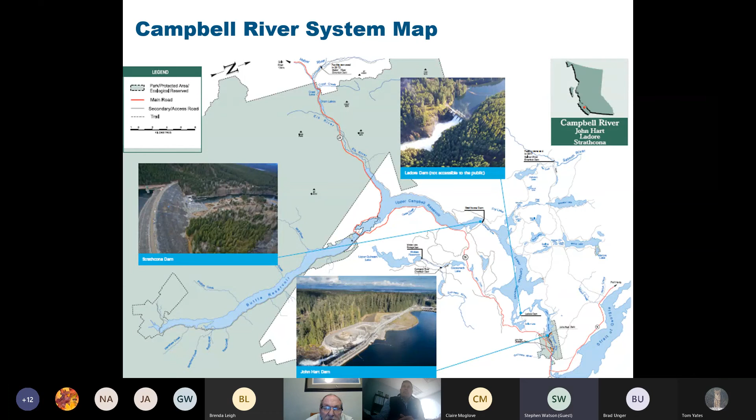Okay, the next slide please. So this is about the capital projects we have planned related to seismic risk. BC Hydro spent about 6 years and $10 million to better understand the potential seismic risk. There are 3 types of earthquakes: a surface earthquake, a deep crustal earthquake, and the big one, a Cascadia subduction zone magnitude 9 earthquake that hits about every 500 years. We want these 3 dam facilities to be able to withstand that type of earthquake and hold the water back. This gave us a better understanding of the ground motions needed for our dams to withstand that. So that's the goal of all 3 projects.

The Strathcona Dam and the John Hart Dam are a potential concern in terms of failure in the event of a major earthquake. The Ladore Dam is a concrete dam found on bedrock, but we need to upgrade the spillway gates. Next slide.

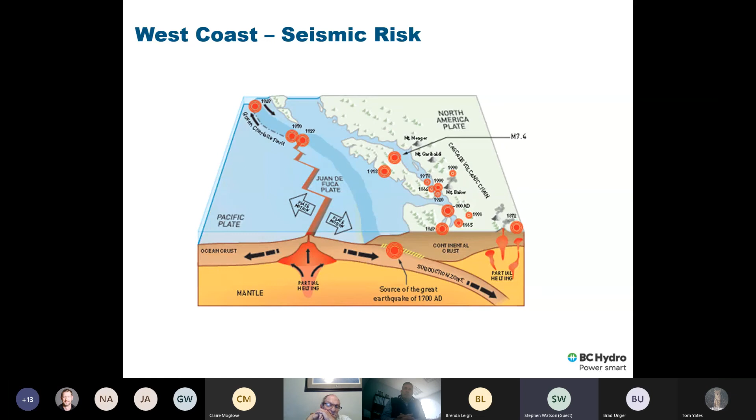This is the John Hart Dam, just over 800 meters long. We have the spillway gates releasing water for flood risk management, the low level water release valve for fish habitat flows, and the intake below ground into the underground powerhouse downstream. Next slide.

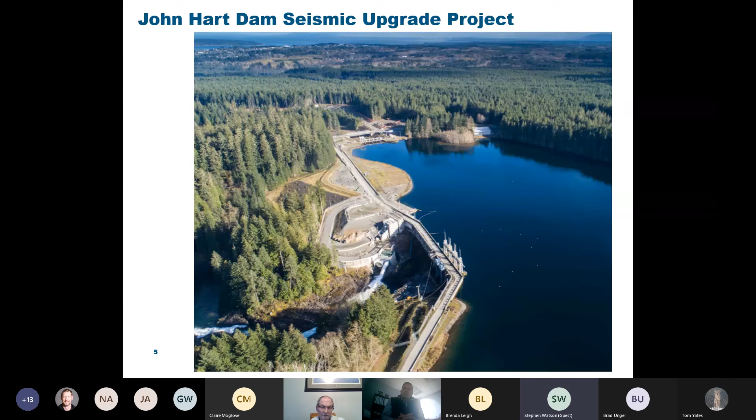This is another view, the downstream view of the spillway gates and the low level outlet. On the top left you can see the City of Campbell River Water Treatment Building, which intakes directly into the John Hart Reservoir. Next slide.

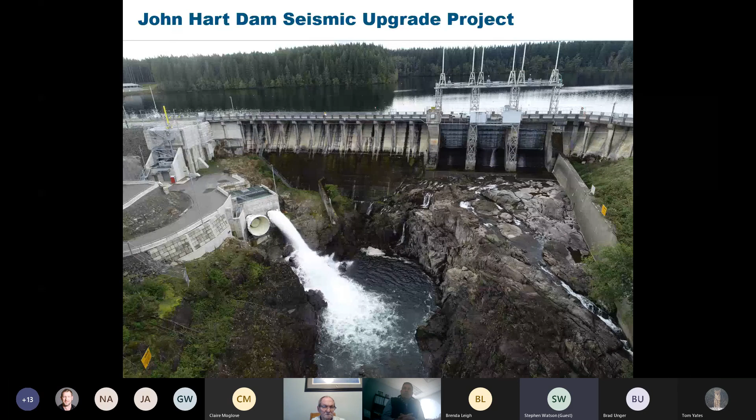I'm not going to go into details here, but basically it involves work on the berms on the upstream and downstream side, and upgrades to the spillway gate hoist systems and spillway gates. Our expectation is that this work would allow the structure to withstand a major earthquake. We have the city water intake, and the regional district also withdraws some water through an agreement, so we have silt curtains and other processes in place to protect water quality during construction. The road across this dam will be closed for about 5 years, starting in 2023 during construction. Next slide.

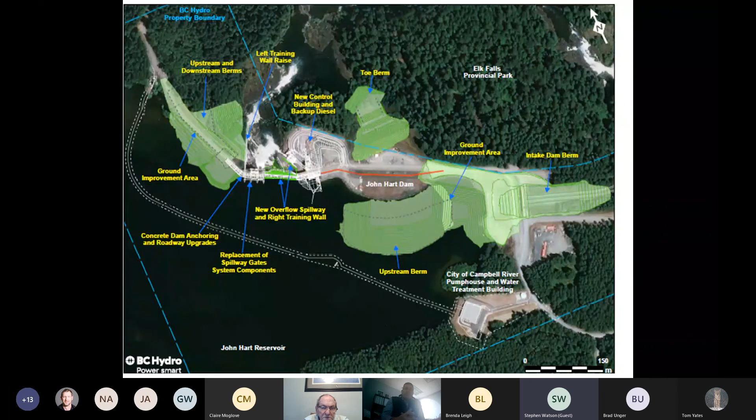Upstream of that is the Ladore Dam with the 3 spillway gates, and as I mentioned, it's concrete bedrock, so it's in pretty good shape. This is about the spillway gates and additional power supply, so they're dependable after an earthquake to continue to move water downstream.

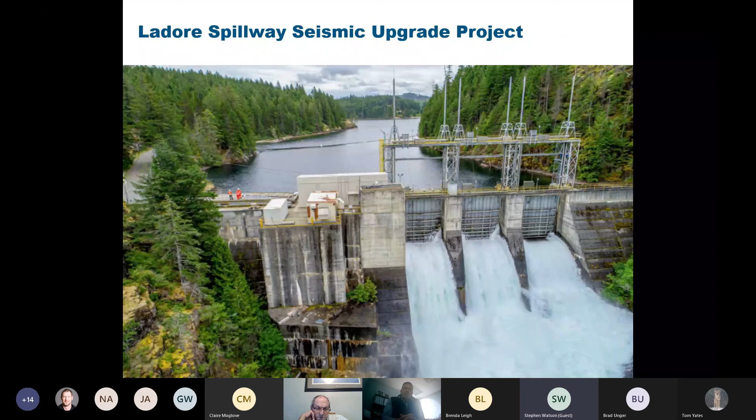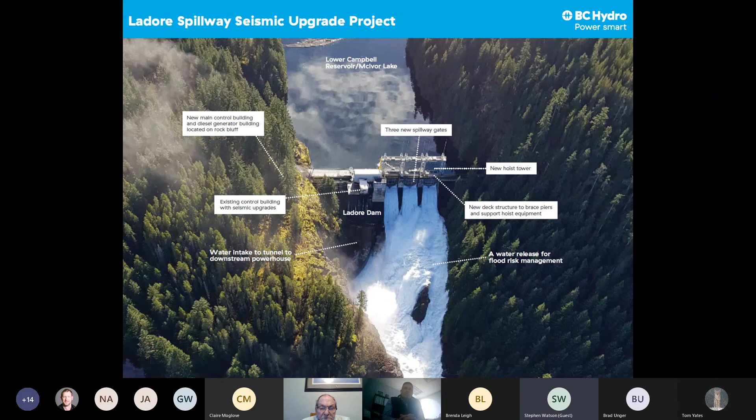This is just a better schematic of the hoist system and the spillway gates, additional power supply, including diesel, so it's dependable. All these projects, by the way, start around John Hart Dam, first around 2023. This one in Strathcona around 2024, and they should all be completed around 2028, assuming we get regulatory and funding approvals over the next few years through 2023 or so.

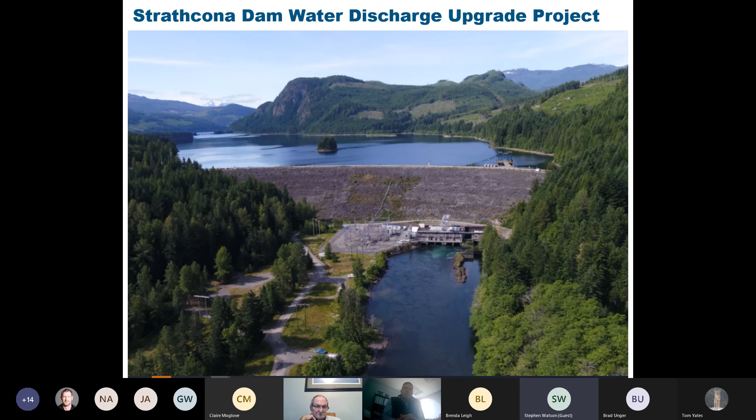This is Strathcona Dam, and as I mentioned, it's the largest dam. It's 53 meters tall, half a kilometer long. We have an intake tower that delivers water down to the powerhouse downstream, and of course Upper Campbell Reservoir, Buttle Lake behind it.

So the issue is how do we lower the reservoir and ease pressure in the dam after a major earthquake?

What we're looking at here is to put an excavated channel on the right bank of the dam, just to the right of the spillway gates. It allows us to go deep into the reservoir and be able to lower the reservoir post-earthquake. That's why we want to be able to pass water downstream here, through John Hart, to the Campbell River, into the ocean, trying to maintain and stay within the riverbanks all the way along. That would take process, allowing us inspections and all those kinds of things.

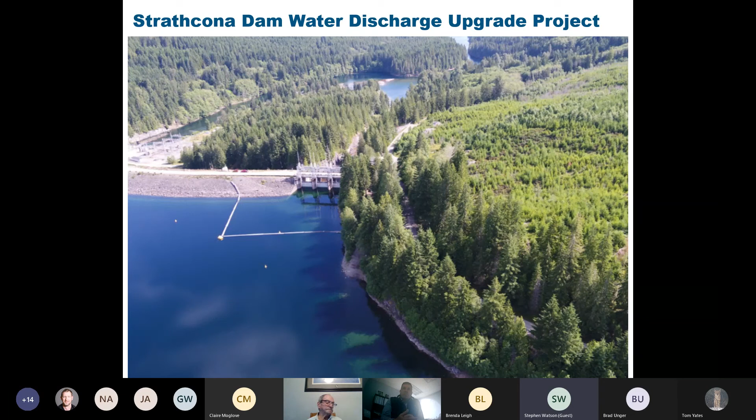It'll also give us better water management resources. At times when we're doing maintenance to the 2 generators and the reservoir is low, it's a bit of a challenge to maintain flows downstream. Sometimes we have to increase the lower Campbell Reservoir level a bit to surcharge it in advance. Those kinds of things will go away, giving us better water management abilities in lower water years. But of course, the main driver here is dam safety.

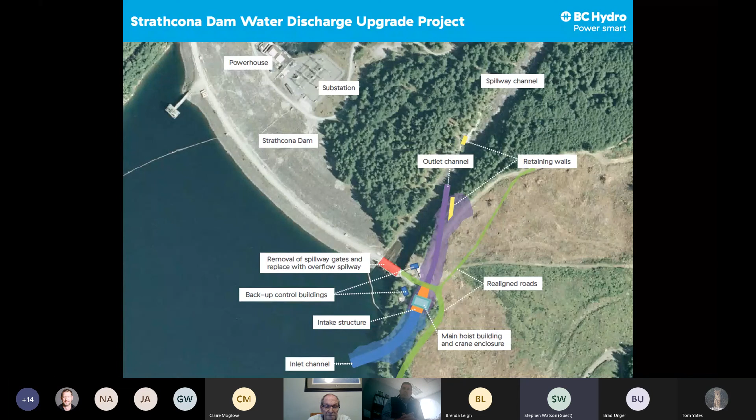Now, there's a couple of things. The road across the dam here will be closed for about 3 years, starting around 2024. There is, in green, a realigned road. Just to the right of the spillway channel, top right of the screen, there's a recreational sites and trails BC campground. It's not too well used, but certainly in the summertime it is. During construction and post-access to that site, the campground itself downstream will be used as a laydown area. And as well, with the proximity of the dam, because of a major earthquake, we've decided to permanently close it.

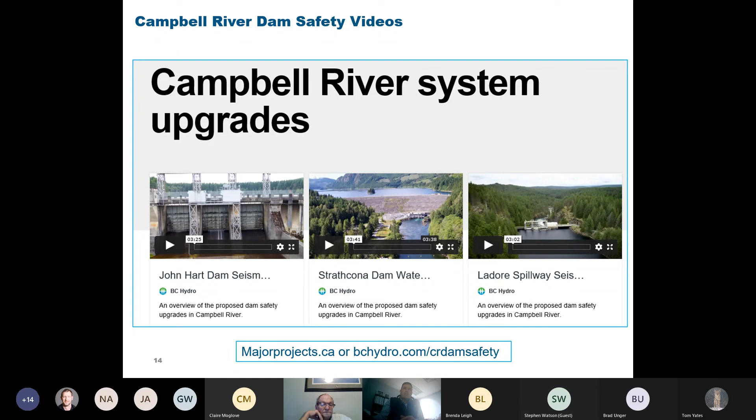So the campground was built mid-1990s. We get about 30,000 people per year. It's free camping, maximum 2-week stay. There's 11 formal campsites and an overflow camping just to the left there. So it's very well used, and this is going to be closed.

We actually had a news story, some of you may have seen it in the Mirror or on the radio. It was released, I think, yesterday. So this is going to permanently close on November 30th, and we're looking to relocate it just upstream of the dam.

So there's a number of unauthorized campsites created in the watershed that Mosaic and BC Hydro closed off, and one of them was called Little America. Some of you would be familiar with that. It was a risk to us, but having said that, we understand why they went there, because it's just a fantastic location, views up the watershed. So this is where we looked at different alternatives and we landed on this one.

So we communicated to the public around 2018 that we were going to move it. Won't get into too much detail here, but basically we looked at different alternatives, did some feasibility studies, confirmed the sites. We do have a liaison committee in Campbell River with the regional district as part of it, like Brenda Leigh and a number of the city councillors and staff. So there's a fair amount of knowledge in some of this.

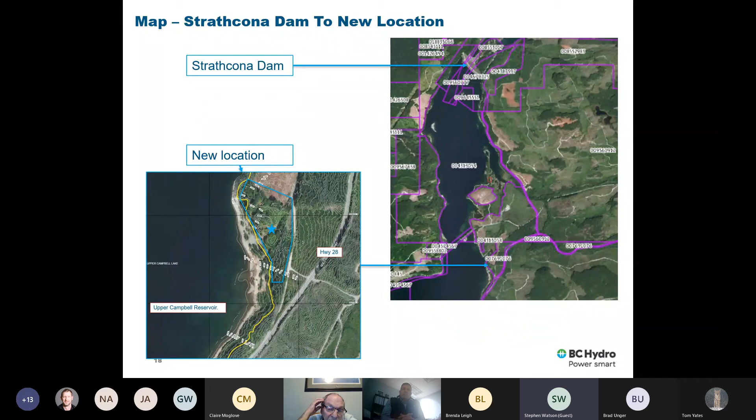And this is the views, and the campground is located in the bottom of the picture here. As you can see, the watershed above and Strathcona.

To allow people with small boats to put car-top boats into the reservoir. It goes down to a certain elevation, basically 217 meters and above, the summer recreation target. So we put, it's not concrete or like that, it's just informal. And it's 4x4 only, but the point is access into the reservoir up here is challenging, so that will help with that.

So this is a bit of a layout coming in. There's basically a couple of dozen campsites. The formal site had 11, this one has a couple of dozen. There's also some overflow camping, and it's really a nice layout in terms of flow. Pretty large campsites that I think people will be really impressed with. There's not just one or two favorite sites, there's probably 8 or 9 really nice campsites. Of course, all of them look good.

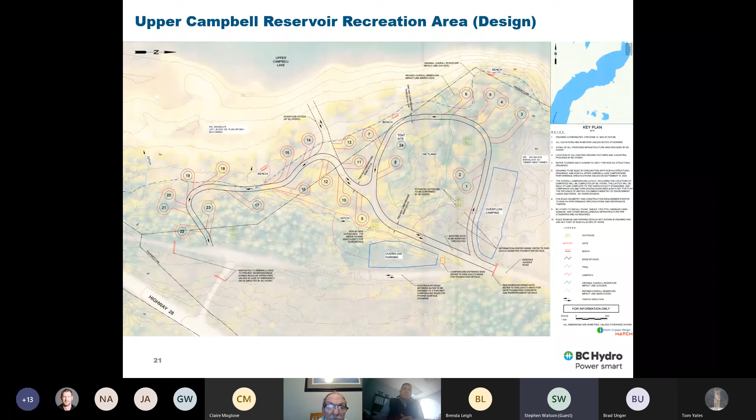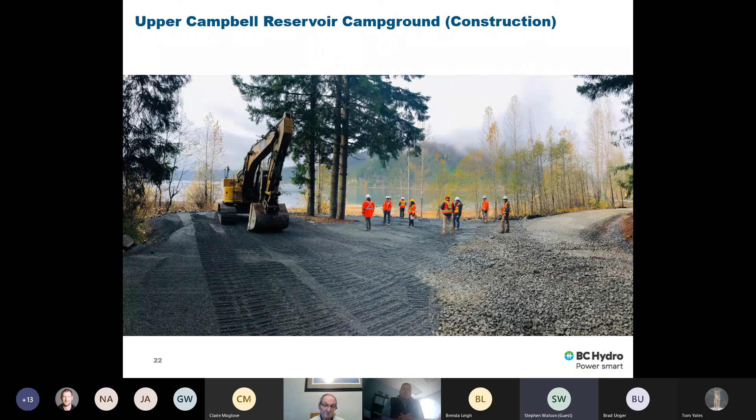So it's just a view over the past couple of weeks of some of the sites being created. This was a direct award to First Nations, with Upland and a few other contractors doing this work on our behalf.

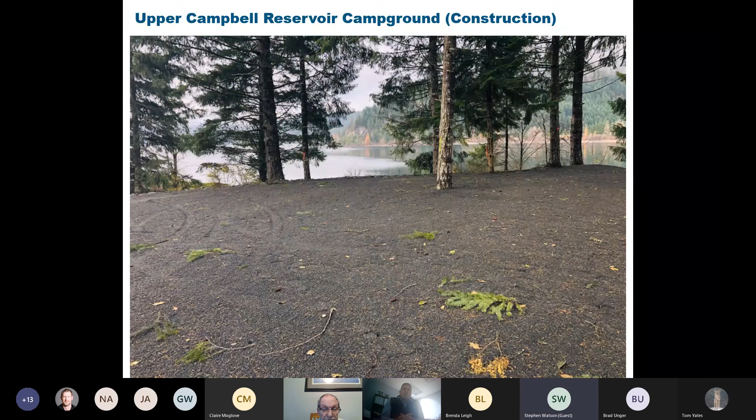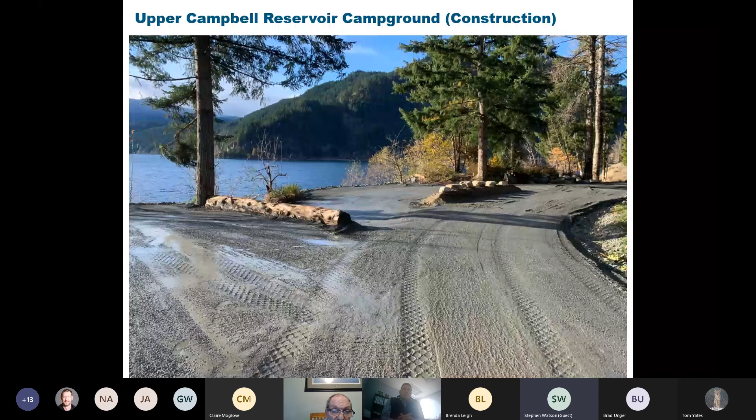Kind of the crush - this is one of the campsite locations. And this is another one. So there's a bit of planting and other things to take place, but we're really happy with the final result, and I think the public will too.

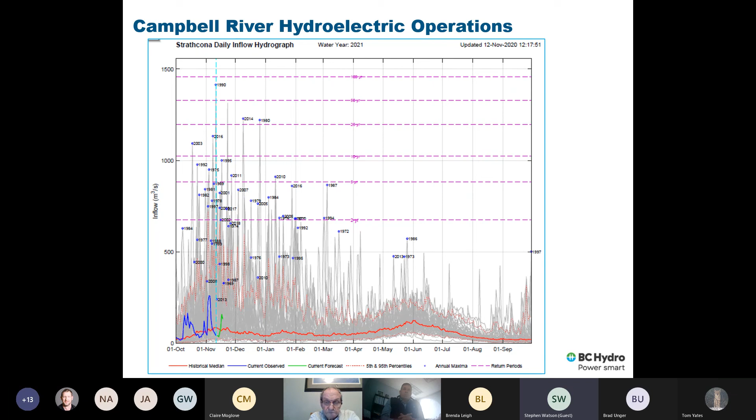So just very briefly on operations, this is the graph for water inflows into the system, and since the 1960s, I believe, this is kind of inflows to date. So we've actually had a dry October and November to start, but it's been drier than normal.

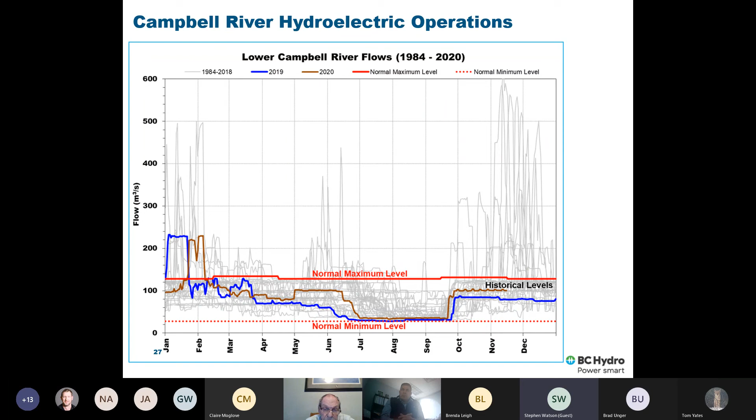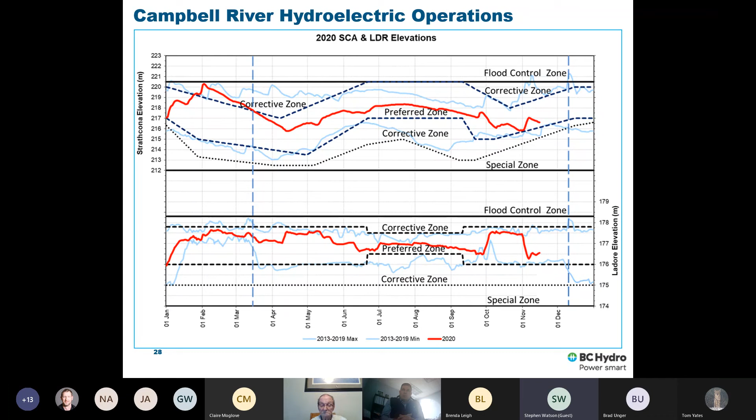Is there any questions? Yes, Director Leigh. Go ahead, Director Leigh. Thank you, Mr. Chair. Through you to Stephen, I just wondered, when Mosaic is managing those campsites, are people doing advanced bookings with them, and is there a charge?

Thanks, Director Leigh. The campsite is going to be managed the exact same way as the existing Strathcona Dam campground, meaning it's all run by BC Hydro. Mosaic has no role in terms of the operations, maintenance, or construction of it - that's all done by BC Hydro. They're kind of a silent partner. We'll have a contractor, as we do now, that maintains the sites and makes sure people follow the rules. Generally speaking, it's a 2 week max stay, first come first serve. There's no reservation system where you can book, and the camping is free - just a benefit for the public in terms of appreciating our operations in the area. There are certain site rules we don't want to get into, but that's the high level.